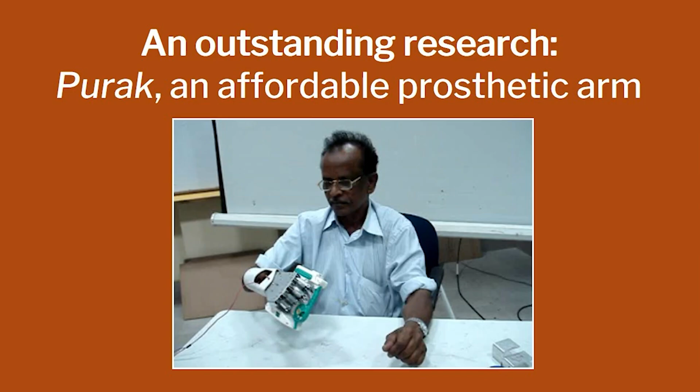The last example is where the importance of research shows very clearly, and that's Purak, a prosthetic arm. This is a colleague of mine named Egnathan, who was one of the finest welders before he lost his forearm. As a result, he is unable to do that quality of welding anymore. Two students, Vinay and Nilesh, wanted to bring him back to the workforce, so they did a master's project on creating an advanced, affordable prosthetic arm.

A prosthetic arm that becomes far more affordable than anything available, and at the same time, to make something so incredibly affordable, you have to really think out of the box and look at technologies beyond just changing the current technology a little bit. For something to be seriously affordable, it has to be seriously advanced too.

They got interest from the Wellcome Trust, a global funding body based in the UK, which gave them another 10 crores to develop this further in collaboration with the University of Oxford. Now they've created a company called Grasp Bionics. This is an example of good research.

The way in which you pick something depends on the something. Now imagine a prosthetic arm that has to do that. Giving a flower is very difficult, it's a very soft object. Even more difficult is holding a very flimsy plastic glass with water such that the glass doesn't deform. How are you doing it? With multiple sensors and actuators. So what did people do? They said, let's throw in as many sensors and actuators as possible, and put controls around them so that an arbitrarily shaped object with arbitrary flexibility can be held by multiple fingers.

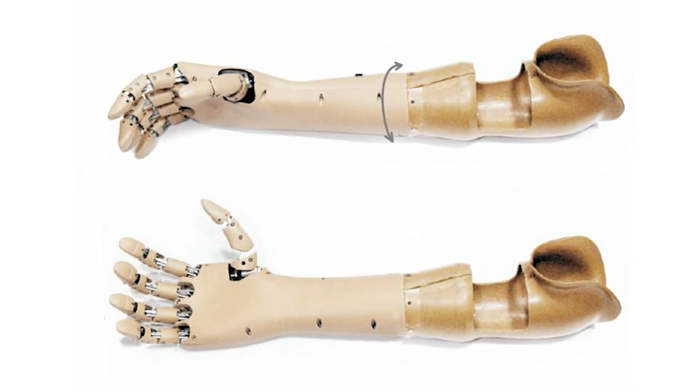So these students say, can you do it at 20,000? And they did that. How did they do that? That is because of good research. They were able to come up with what is called under-actuation, where you use a single actuator to operate 5 different fingers in a coordinated manner so that it wraps around an arbitrarily shaped object, and something called myomechanical sensing, whereby the movement in the muscle can be sensed as a signal for it to operate.

Now what is it that enables somebody to do all of that? We need to understand there is this thing called business which is interested in money. It doesn't matter whether you are doing social innovation or not, you have to fill your stomach, right? Somebody has to pay you, so there has to be money. So they are doing it for money. They call it profit: the difference between the price at which they sell and the price at which they did everything else for that object so that they can sell.

There is also this thing called society. What the society does is say, okay, I want value. What is value? Value is not just based on price, right? One simple way of looking at it is, what is it that you want and what is the price that you pay for it. If you take this thing, how does it produce that value? It produces that value by either integrating technology or by creating technology.

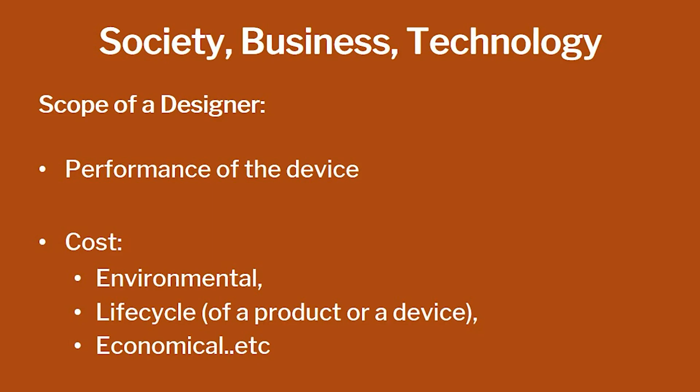So if we agree with that, then value is performance by price, and profit is price minus cost. What is it that is in control for us as designers? We can actually tweak two things: one is performance, and the other is cost. It can be the cost on the environment, it can be the life cycle cost of a product, and so on. Now, for this venture to be successful, both business and society have to agree that we like it. The business likes the profit and the society likes the value. If they don't, it's not going to work. It has to be a win-win situation.

So we need to understand the needs of the user, and the aspirations of the user, and immerse in the user context. To do that, we need to have two things, which I broadly call domain knowledge and process knowledge. Domain knowledge means knowledge of what is - what are the users like, what are their aspirations? Process knowledge means how to find that, how to process, how to create knowledge.

Here is the second example. There is this disorder called muscular dystrophy. There is a protein called dystrophin in our body that is essentially a messenger between the signals that come from the brain and the muscles. If there is less dystrophin, there are weaker signals that go to the muscle. The muscle will not operate often, and as a result, over a period of time, muscles will not remain strong. This is something that is dominant in younger children and men, and recessive in women, so women will survive for a long period of time, but at a very low quality of life.

So one of the things that we did in Cambridge that I was part of was to develop a simple device which we called mobile arm support. Now what is mobile arm support? These people would find it very difficult to move their arm up and down, because that requires much more force than going sideways. So we developed basically a glorified lead screw that you can rotate with a motor here.

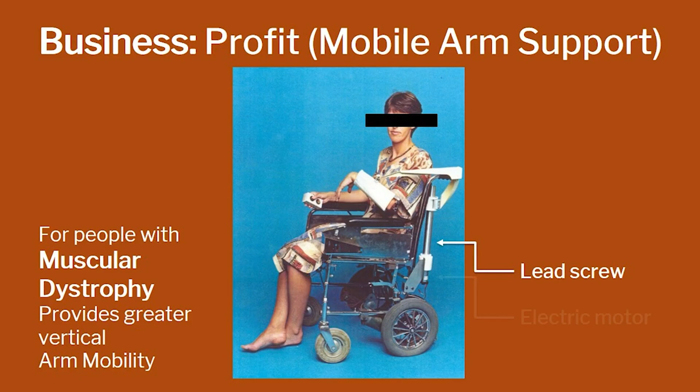If you have a screw that you rotate, and if there is a nut, then the nut will go up and down if you don't allow it to rotate. And that's all that it had. So that's the nut, and then here there is an arm with a sling with enough degree of freedom that the arm can use inertia to move about. With just that simplified device, you have just a two-way switch going up and down, and two limit switches to make sure that the nut doesn't go out of the lead screw. That's all that it has. As it is, it's very inexpensive.

So we went to the British Muscular Dystrophy Society and they said, brilliant product, okay. So we had to do field trials, talk about piloting later on. We had to do field trials.

So I went with a colleague of mine to the outskirts of London. There was a lady with a recessive condition common in ladies. She survived, she's 37, 38. She agreed to be a guinea pig for us. She had her wheelchair, so we connected the device there. We said, what would you like to do? She said, well, I want to type on my computer. So we said, fine, let's go.

And she sat there and there is this keyboard, right? The keyboard is about 1.5 feet. She put her hand like that and slid her arm like that. It would take less than a second for her finger to go from one side of the keyboard to the other. She started crying.

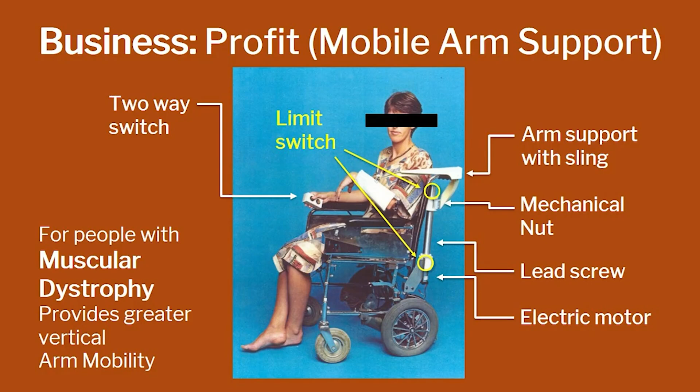If the product price goes up and people's ability to pay is low, this product is not going to sell. Therefore, it's not a business proposition. Therefore, for many years, nothing happened.

Until in 2008, I received a message from a colleague of mine, one of the professors, Ken Wallace. He said, finally, your product is out in the market. What happened was the government agreed to pay for the difference, and suddenly it became profitable because the company gets the profit and somebody pays for it, partly the person and partly the government. And then it becomes a value proposition again.

So once again, you need to have domain knowledge. What is the cost of the material? What is the cost of labor? What is the cost of manufacturing and so on. But you also need to have the process knowledge of modeling costs.

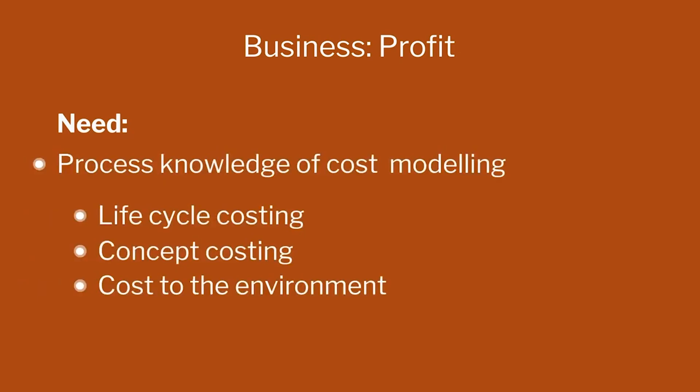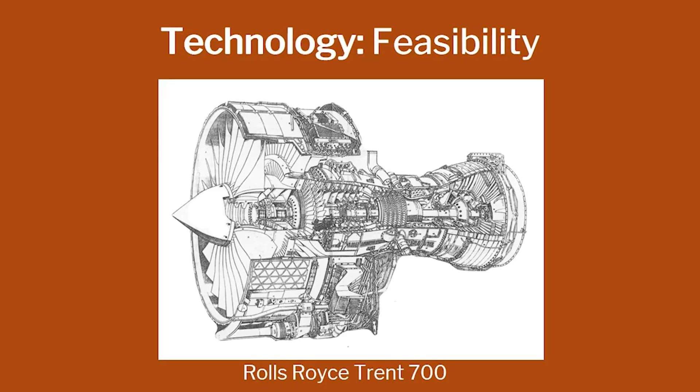There is a particular part of it that I would like to talk about. This little piece here, which is called the nose cone. You want the nose cone so that the airflow around it becomes nicely distributed and you don't lose much energy, but it also has a side effect.

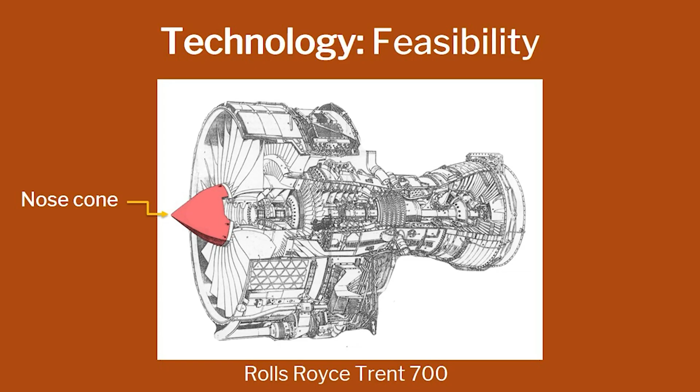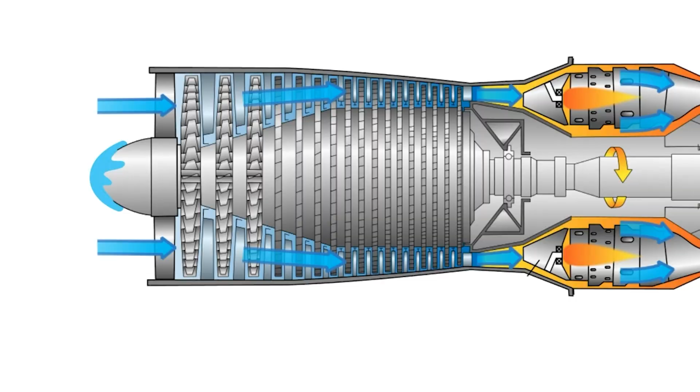Imagine an aircraft flying at 1,000 kilometers an hour, 30,000 feet. The temperature is such that snow will start forming, and because of the compaction from the airflow, the snow will turn into ice, very brittle, it will break into little bullets that are shooting at this very expensive high temperature part.

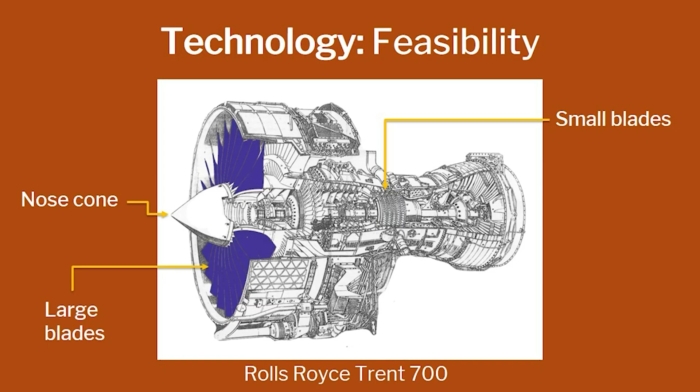The blades are very tiny here, right, and very big here because it's getting pressurized. When the air is getting pressurized, it requires less space, right? So those are very expensive blades, single crystal blades that operate at a temperature higher than the melting point of the material.

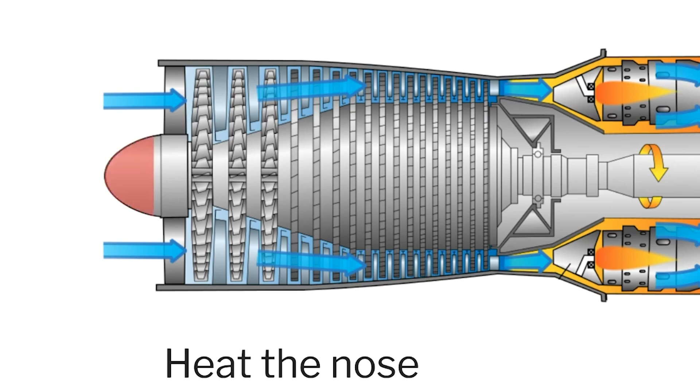Now think about how they do that. There are very interesting technologies to do it. How do you ensure they are not shot at with bullets? This is a problem engineers and designers have been working on for a long time. What did they do? The first thing that comes to mind is heat the cone so there's no formation of ice. Bad news, because remember, value is performance divided by price.

What is the price of that? Heating against minus 50 degrees Celsius.

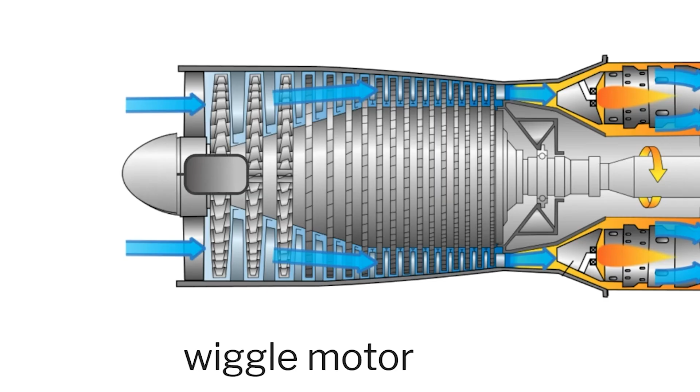And then somebody said, why don't we think of this as two pieces where the front piece can be attached with a wiggle motor. It rotates and then rotates in the opposite direction and stops. Now if you have a wiggle motor that you can program at a frequency at which it wiggles, such that it's faster than the time that it takes for snow to become ice, snow will never become ice. Therefore, snow will simply break and fly into the aircraft engine and nothing will happen because it hardly has any inertia.

It's like fluffy, so it's lower cost. Remember, performance by price. Now you are getting the same performance, but you have less price.

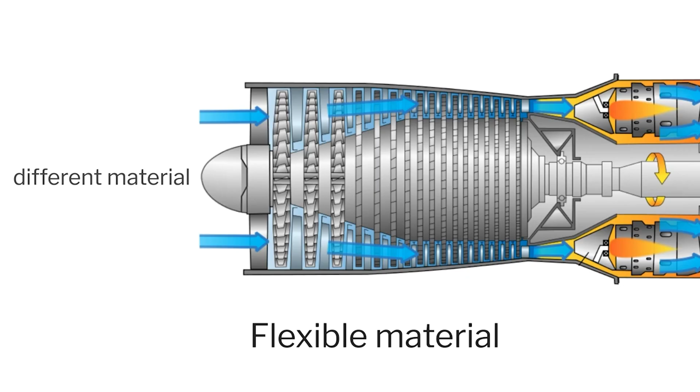Why can't we make these out of flexible material? So if I can keep the front part slightly flexible, then the object will vibrate because there is enough energy around. If it vibrates a little bit, that will be enough for preventing formation of ice. Now you have increased the value very substantially. You have shifted the problem from the energy domain to the material domain.

Pretty much everything can be done either using material or using energy. Biological systems all push solutions from the energy domain to the material domain, because energy is so expensive for biological systems. So the knowledge of society, what people value and so on, knowledge of business, what would be sellable, what stakeholders would like, and knowledge of technology, what is possible, must come together. And design is the great integrator.

It's interesting that human beings become more creative when they have less resources. So deprivation is not a bad thing.

Here is an example from computer-aided product design, CAPD. In this case, deprivation was that you have a handheld hair dryer to design, except that you cannot use heating elements.

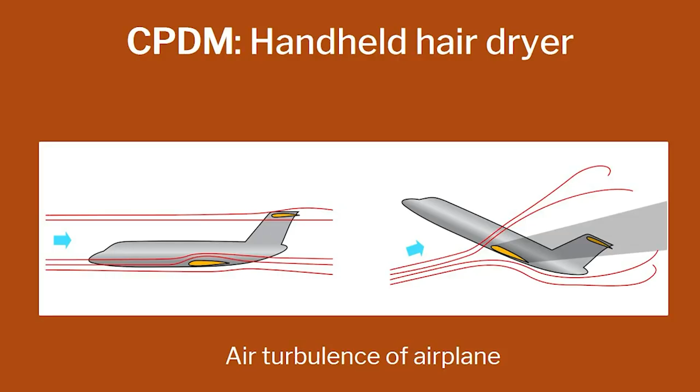So what Himanshu did was, he looked at something that aerospace engineers hate, and that's turbulence. When you have this wing, for example, you want the air to flow nice and smooth on it. That way you reduce or minimize the energy dissipation across the layers. And when energy is less dissipated, the system is more stable. When there is swirl in the air, there is greater chance of mixing and, as a result, losing energy. So basically what they created is a glorified vortex generator.

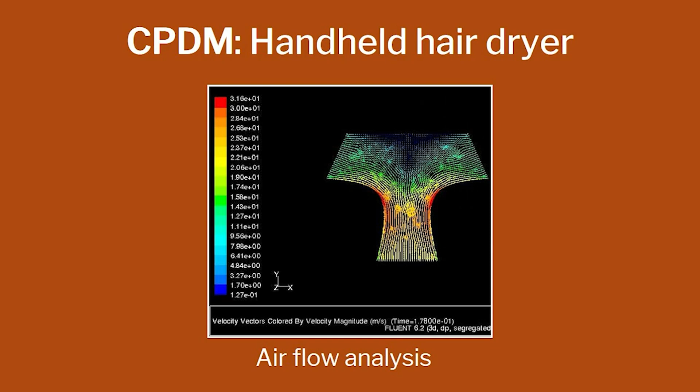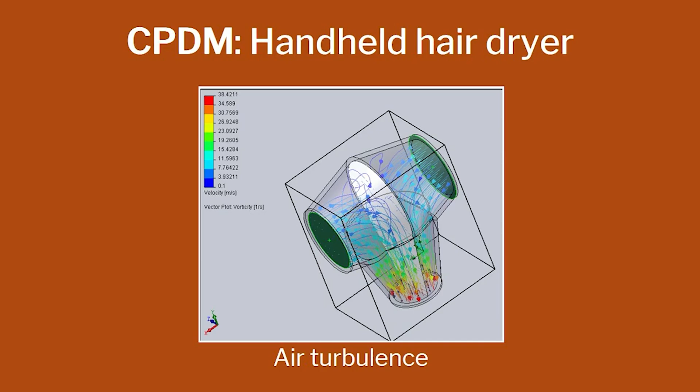And how did they do that? By bringing in technology. Can you use two fans, for example, to create two opposing flows of air, which will then mix and create these twists? You can use methods and tools to look at the flow and see how it is going to come.

But also you have to say, okay, what's the message? How is the person going to hold it? So this was something where you hold in the middle and you get two spouts of air coming out in order to dry the hair. And of course it should look good and it should be usable. So usability, aesthetics and functionality must come together.

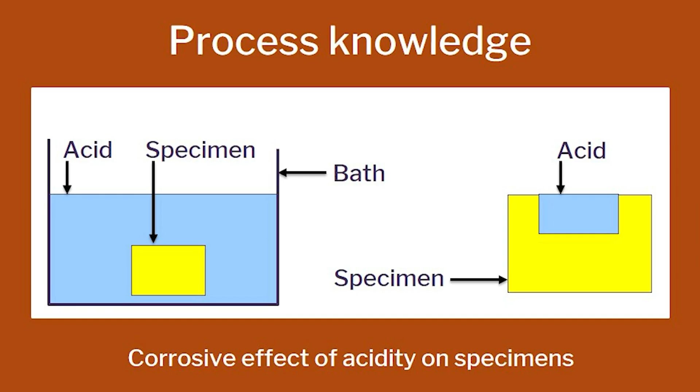So this is a sketch for another sensor. In this case it is sensing corrosivity, how corrosive this blue acid is for this yellow specimen. So what you do is you have an acid bath, you put the acid there, you take the specimen, plunge it in, leave it for a specified period of time, take it out, and see the difference in size between the original specimen and current specimen.

And it is the difference in size which is an indicator for how corrosive the acid is for that particular material of the specimen. But the problem is that acid is very democratic and does not discriminate between the lining of the bath and the specimen. As a result, this very expensive lining also gets corroded away, leading to a very expensive process of relining or throwing it away and creating a new one.

So there is a problem, and there are many solutions that people have suggested to overcome that, one of which is changing the material of the lining of the bath. But then, can we have simpler solutions? This has driven people, and this is my personal favorite: turn the specimen into a bath.

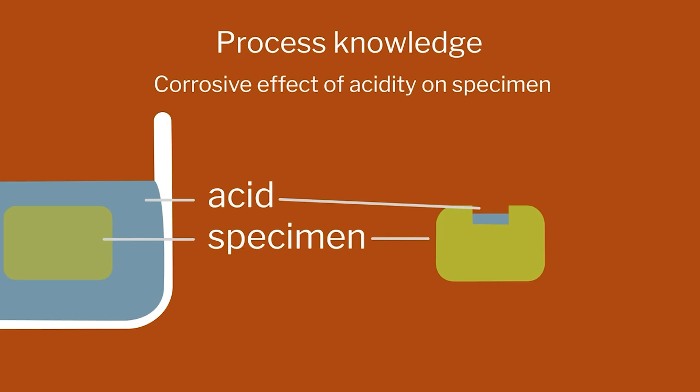What you do is make a little hole on the top, a blind one, and then put drops of acid there, leave it for a while, and see the difference in size of the hole after a certain amount of time has passed. So the question now is that you do not need any further domain knowledge than you already had in order to create this idea. Therefore, it requires process knowledge, something we can inculcate, that is not domain knowledge. So what do we do?

Train our students in a structured design process. When you are designing something incredibly complex, one example would be the Trent 700 engine I showed you, which has something like 1,000,000 parts, and typically requires about 5,000 engineers or people collaborating with each other. You need a process that can synchronize that activity.

If you are working on a technically intensive product, you need a technical orientation, but you also need to understand the user. We remember society was one block, so immersion into the user environment, understanding them as they understand their problem, is very important.

Realizability is very important. We'll talk about piloting and production later. Being able to make and see whether it works, where it doesn't, and how to change it is very important, so learning by doing becomes essential. Research can also play a significant role in all of that, so you need both domain knowledge and process knowledge to do it.

So here is one process I want to run through with you. The process has only four steps. We start with task clarification, which is sort of doing the research.

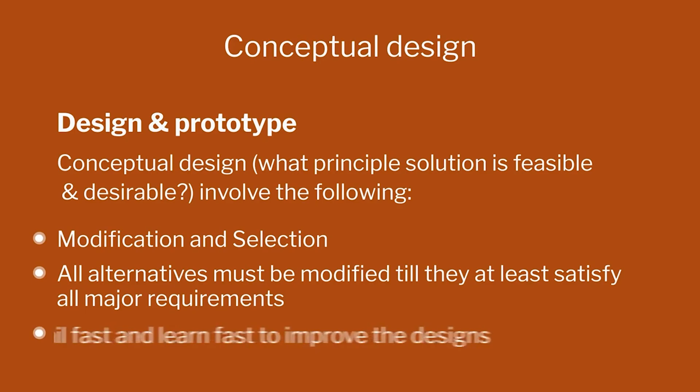One message here is that you should fail fast. It's good to fail actually. The more you fail and learn from it, the faster and cheaper you fail, the more knowledgeable you become very quickly.

So what we do is come up with a principle that works. Taking an example from technical functionality, the basic principle on which a chair works is that it is a spring. That's the principle solution, looking at the core of what the chair is trying to provide. Of course, that's not the only thing you figure out - you have a distributed load, people's bottoms are all different, and the chair has to cater for all of that.

Once you have done that, you can create a spring in a shape, and there can be zillions of shapes. I can have a chair with only the backrest and bottom rest, or one with support at the bottom, or one with no backrest at all, only the resting body. So I can have multiple embodiments, multiple bodies with which I can embody the principle.

So again you need to do the same thing - look at multiple alternative embodiments. Should the chair look like this? Should it look like that? And so on. You need to again model and evaluate the alternatives.

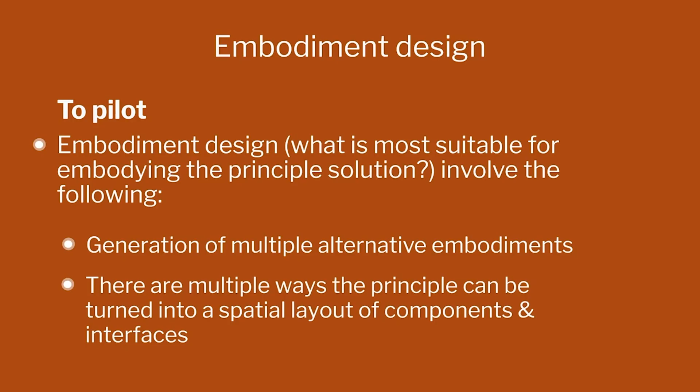And now your requirements are becoming different. What you are creating now is spatial layout rather than the principle, so you're focusing more on components and interfaces. You're also looking at other best practice requirements such as reliability - it must do the same thing over and over again. Somebody sits here, goes back, somebody else sits, goes back - all the time it must support the person. That's reliability.

What is robustness? Each chair is slightly different from another. However hard you try to make something the same, it's not the same, and however similar you think the environment is, it is not. If I vary the parameters with which an object is made - size, material, production process, the quality of the interfaces and welding - they're never the same. So if I can make a lot of variation and yet the object still functions, then it is robust.

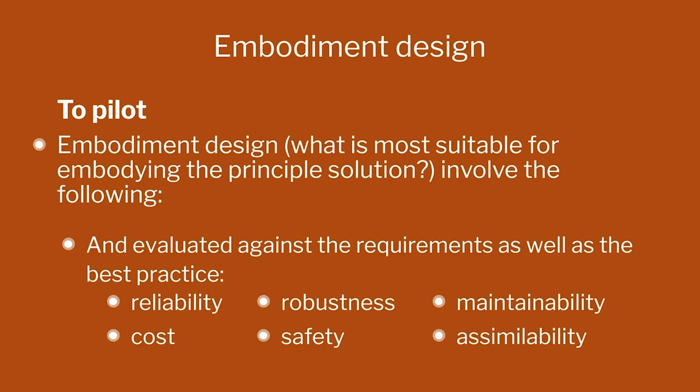I want to sensitize you to the fact that there's a whole bunch of best practice requirements you don't write down - it should be maintainable, it should be safe, of course. You have to bring them together so that the parts, the materials, the implementation details are right enough that you will reasonably survive. And of course it doesn't work the first time, so you keep fixing it until you're okay with that.

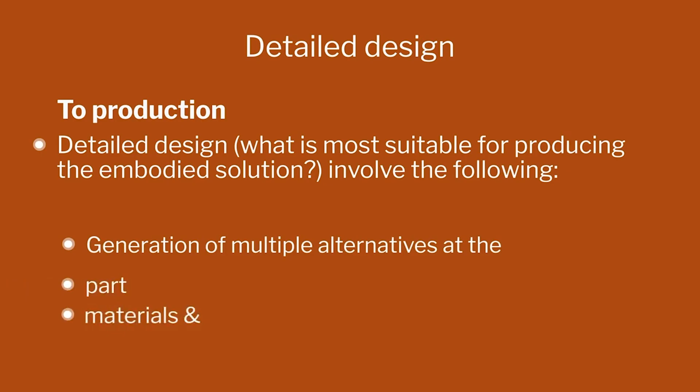Finally, if you're happy with that, you go to detailed design, the last of the four stages of design, where your intent is to make sure it's producible in large quantities. Once again your focus has gone from spatial layout to the components, the parts, the specific quality of the materials - the focus is getting smaller and smaller. So I want you to now focus on the detail of every piece.